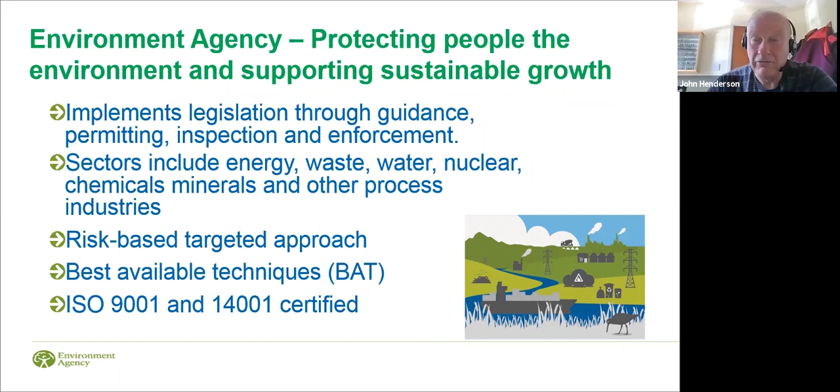The sectors under permitting are energy from waste, water, nuclear, chemicals, mining, industrial mining, all sorts of stuff are there, mining waste. We use a risk-based approach, as it's commonly described, and BAT kind of sets the standards for us, best available techniques. You'll hear that term quite a lot. And we also encourage operators to be certified to third-party standards.

So EPR in Wales and England, as pointed out. EPR is a kind of overarching set of regulations, and it implements the Industrial Emissions Directive specifically, but also the Medium Combustion Plant Directive, Landfill Directive, other directives. It can also implement parts of directives, for example, Article 15 of the Energy Efficiency Directive, that's CHP ready, so we implement that, and domestic legislation, specifically one that I'm interested in, specified generators. Those are diesel engines. There we have a schedule for that.

So from a practical point of view, it's quite easy to slot in new requirements into EPR. That's the way it's designed. It includes generic requirements for permitting, inspection, review, public participation, enforcement, charging, you name it, it's all there. It all should be there. So it is quite easy to slot in new requirements.

There are certain must-dos that are relevant for combustion. We have to implement what are known as Chapter 3 IED, and that's the old Large Combustion Plant Directive emission limit values, and each sector has its own BAT reference document. These are like holistic environmental performance standards, came from the Seville process, and they address environmental impacts, and theoretically considered cost and benefit too.

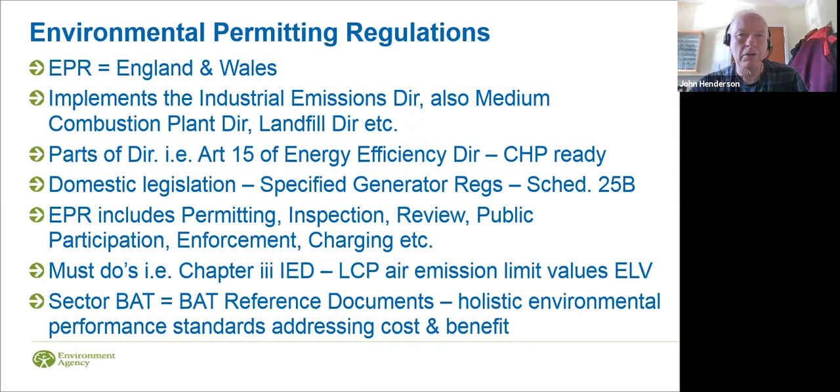Permitting of net zero. Obviously, we're doing carbon capture and storage today, but there's also blue and green hydrogen we'll have to permit, and the combustion of hydrogen under carbon capture. We're talking pre and post combustion, oxy-fuel, Allam cycle, maybe other permutations around those. The industries are all the big ones that need to be decarbonized. So we're talking power, refineries, energy from waste, cement, iron and steel. There'll be others.

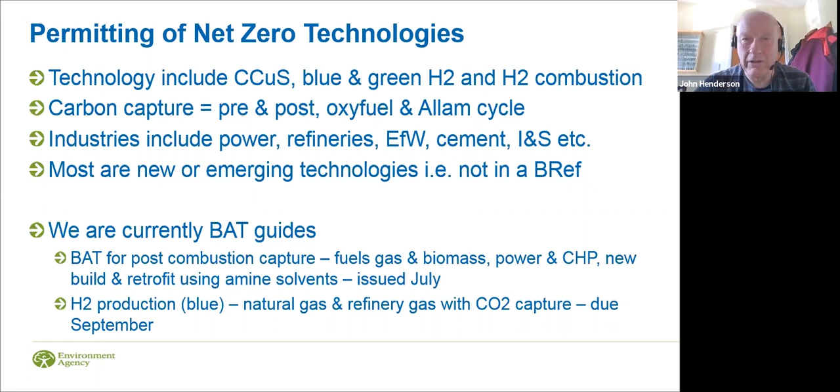As you're probably quite aware, these are all new technologies, not a lot of it out there at the moment. So they're not actually addressed under any BREF. There are no existing standards that address carbon capture and storage or any of these other technologies yet. We're currently working on BAT guides. There's one that's just been issued, the one we're talking about today, post-combustion capture. It was issued in July. I'll talk a little bit more about that in a minute, but we're also working on one for blue hydrogen, natural gas and refinery fuel gas with CO2 capture. That's due out in September, and who knows, you might even get a presentation on that one day.

So a little bit about BAT guidance. Now, they're slightly different to a BREF. They're there where there is no BREF. And this is where essentially the regulator, following Industrial Emissions Directive Article 14.6, sets permit conditions, generally speaking, in discussion with operators. We publish BAT guides, and they're there to assist applicants and regulators in the permitting process, also to inform the public where they're interested. It will summarize the evidence available on those emerging techniques, following what's known as Annex 3 in the IED, which is a long list of criteria. A little bit more about that.

We consult with industry, and we agree these across the UK regulators, so they are in theory applicable across the UK. What they do is identify key environmental issues to address and best available techniques. They're not a regulatory requirement. If you as an operator have a better proposal and are happy to justify it, then we'll certainly look at that. But it's a good idea to follow these guides, I think would be our advice. Whatever happens, the environment is protected.

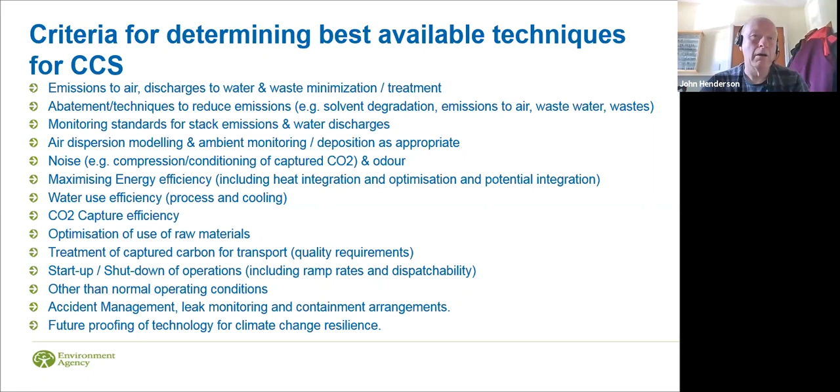So as I say, July, we issued these. There are two documents. One is the evidence document, which was put together by John and the UKCCSRC, a collection of evidence. We're talking about new build and retrofit, amine capture based technologies, and it's for both power and CHP, and the fuels are natural gas and biomass. As I say, it's an emerging technology. And then we on gov.uk have published the summary guidance, a shorter document which has the key features in. That is the BAT guide we've just been talking about.

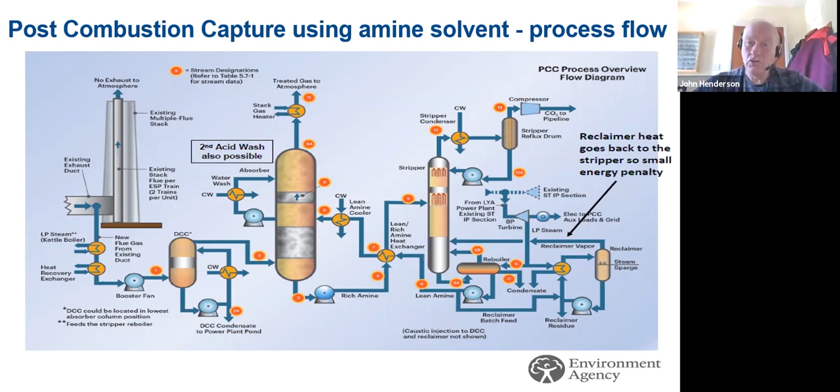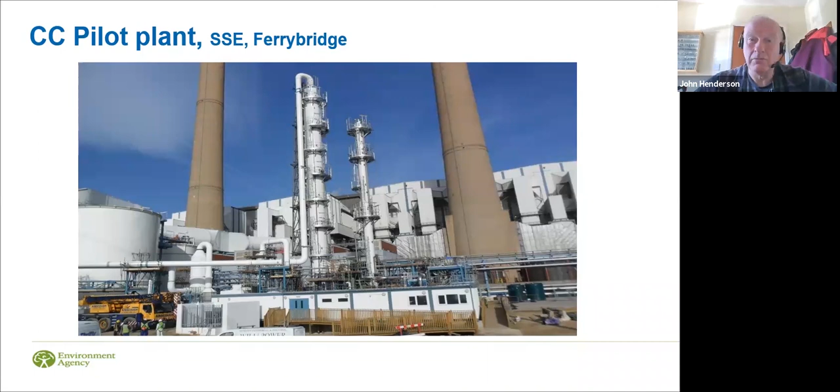So here's a picture of one that was in the UK a few years ago. It was a pilot plant at Ferrybridge coal plant, been and gone now, but nevertheless, it was a good pilot plant. And you can see there quite clearly the larger absorber column and the smaller stripper column. This one did about 100 tons of CO2 a day, was only about 1% of the flue gas, and was post the flue gas desulfurization, so the SO2 was minimized. However, there was NOx in the flue gas, so that did cause some interesting things. Trial ran for about 18 months.

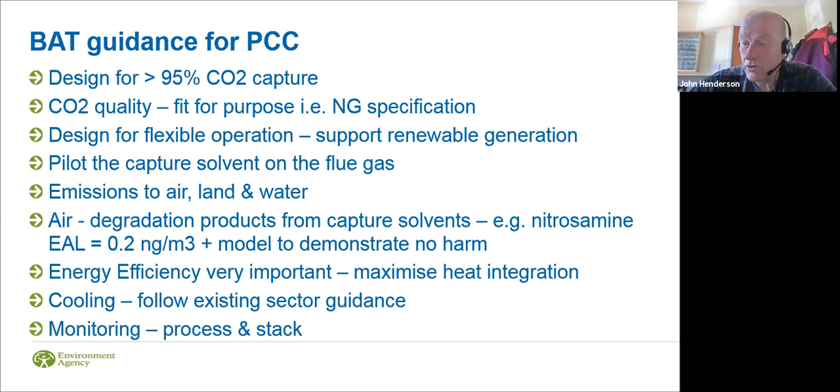Monitoring, again, that's a key part of any process, both the process monitoring and the stack monitoring. Process monitoring is important to demonstrate you're looking after your solvent and you're capturing what you hope you will be capturing.

The newer solvents tend to be more energy efficient, or at least that's the recommendation by those who are selling them, and so have some important advantages there. But also, as mentioned, it's quite possible that they may have more harmful emissions to the environment. Emissions can always be abated. We'll talk about that in a second.

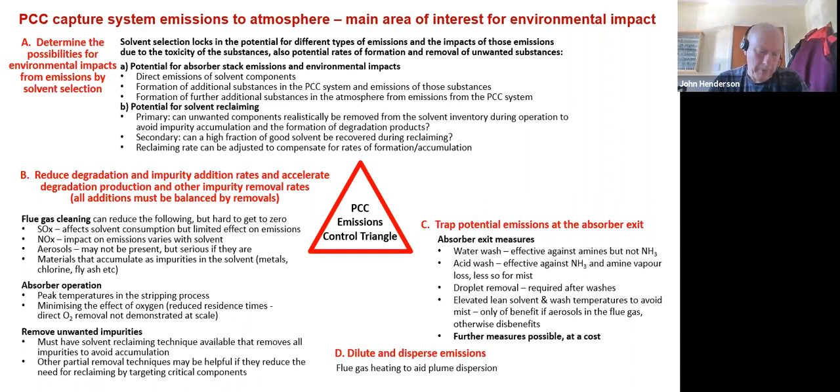So a couple of extras, as it were, that need to be considered when we're talking about permitting carbon capture and storage. There is public participation, which is part of the regulations, and this really requires that the public are given an opportunity to have an input to the process.

It happens perhaps differently across Europe, but the way we do that is when the applicant makes an application, it goes on the public register and is consulted on, advertised, and there's a month process where we will accept comments from the public and other stakeholders like the HSE, the local authority, and others who may be interested in this.

All these comments will be addressed in our determination and included in a decision document, which is also available in the public domain. For sites of high public interest, we will also consult on the draft permit and the decision document. So there's a second bite at the cherry, as it were, for the public after that. Sites of high public interest tend to be things like energy from waste plant or maybe fracking. They are the ones that get the public most interested at the moment. Not sure if carbon capture or net zero technologies will fit into this category, but we'll wait and see.

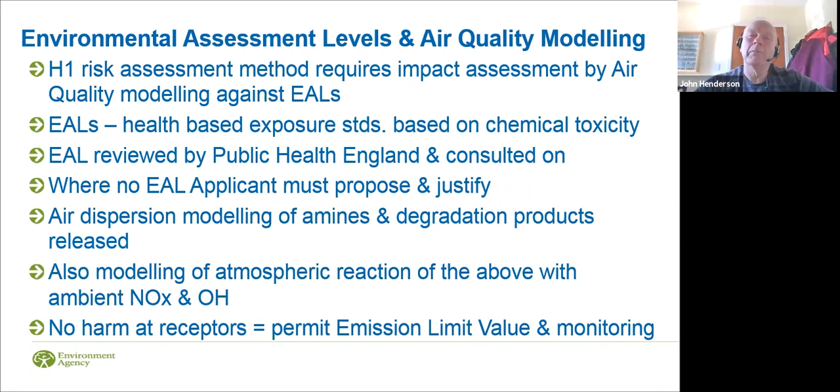So what's next for permitting then? Well, we can certainly have improved atmospheric chemistry modeling of those amines. We need some further work done on that, better models. We also need monitoring methods. A lot of this is new technology, not been deployed, and so we need to have standards that operators can use routinely, and that's both for stack monitoring and for ambient monitoring. We're talking about new substances, some of them quite low detection limits, so there will be new methods required. As already implied, we will need to develop more environmental assessment levels for different solvents, different degradation products, so that's going to happen over time.

One of the things we haven't considered in detail yet are clusters and multiple sources of amines, and the potential environmental fate of large amounts of amines in the environment. So that's something that will need to be studied in due course. Clearly, we're going to need to produce more BAT guides on different net zero technologies and other priorities. So, any other questions?